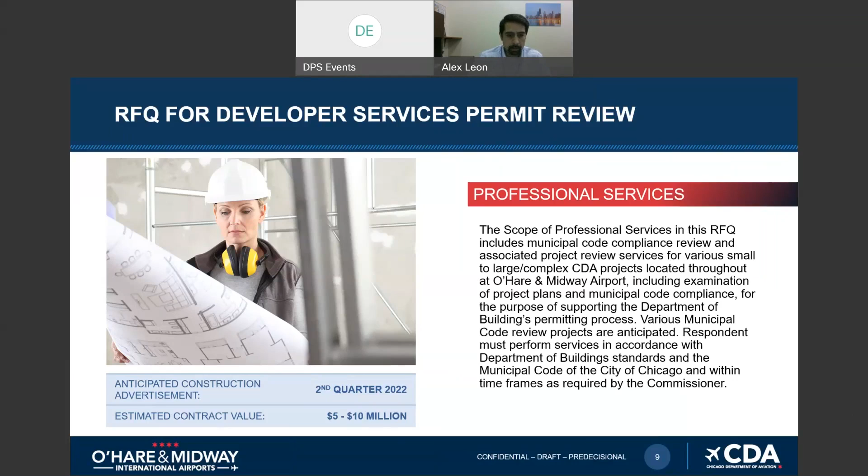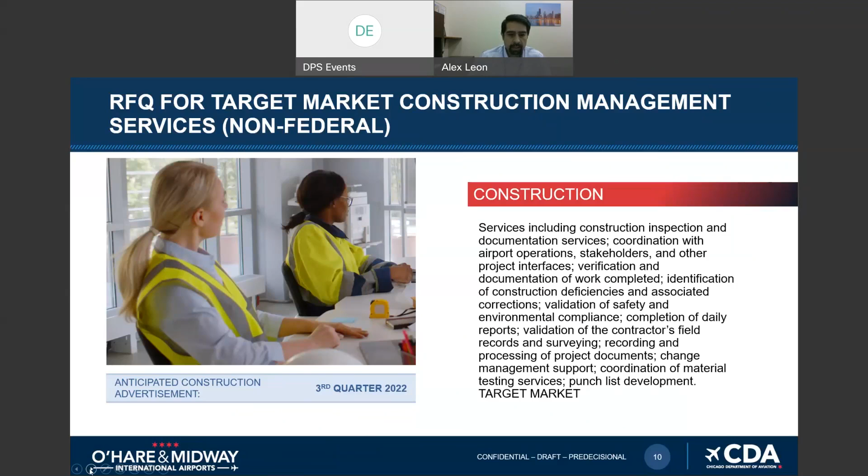The second opportunity in professional services is for RFQ for target market construction management services. This contract was previously out. We are going to re-advertise in the third quarter of 2022. My understanding is that there were some issues with those contracts, and those that had submitted have already been notified by DPS. So again, we anticipate re-advertising of these contracts in the third quarter of 2022.

Next slide, please. And as I mentioned earlier, these are construction opportunities through DPS. So these are typical opportunities that you would find on the DPS website if you're signed up to receive their alerts.

The first one's a restroom modernization program. This one's for Terminal 5. We've completed a couple of projects a few years ago in the domestic terminals, Terminals 1, 2, and 3. This one is for Terminal 5, for those sets of bathrooms that are in the original or existing part of the building, not the new building, not the extension part.

We anticipate this would be an SBI 1 category, and the advertisement would be here shortly, second quarter of 2022. The estimated contract value is $3 to $5 million. Next slide, please.

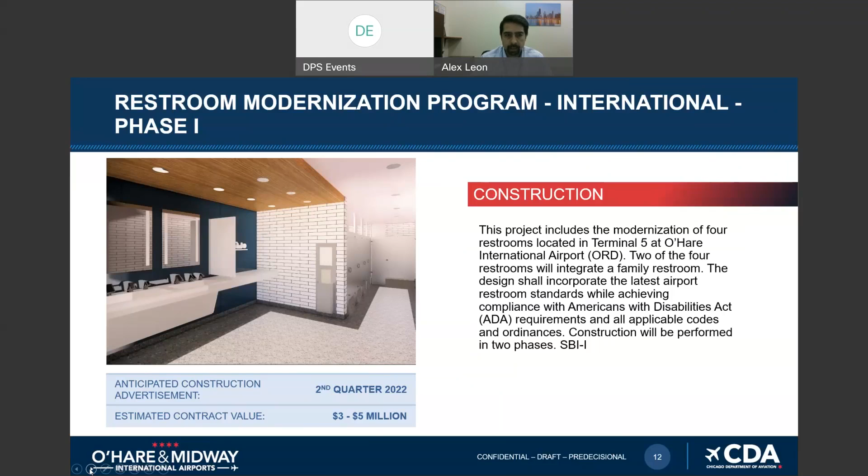Terminal building ADA and Terminal 5 building ADA improvements. Again, this is another project centered in the Terminal 5 campus. This would be throughout the facility at the curb front, and then as identified by our requirement from the FAA, we have to do periodic inspections. We just completed our own ADA survey as well, so this would leverage both of those studies or surveys that have been performed, and we're going to make some improvements.

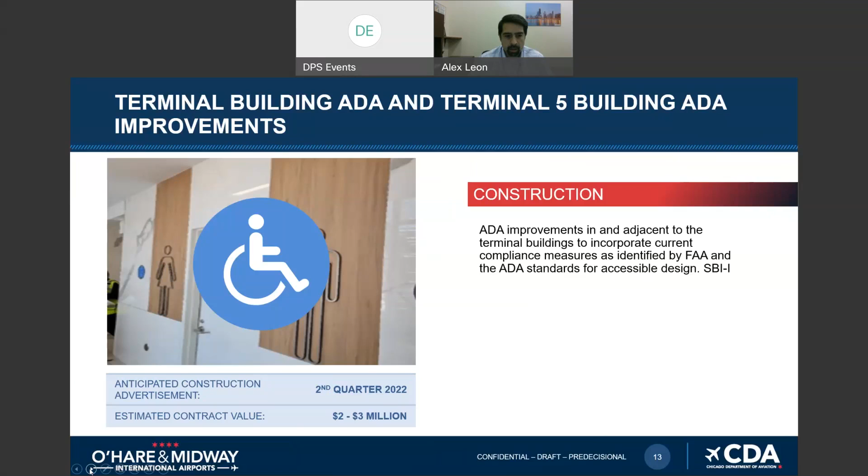So this is an SBI 1. We anticipate second quarter of 2022, so here shortly. The estimated contract value is $2 to $3 million. Next slide, please.

Terminal parking garage structural investigation and repairs. This is a Midway project. We've just completed a couple of projects that were part of the Midway modernization. Parking garage enhancements was one of them. Out of that design and some of that work, we've identified some repairs needed in the helices. So this project would go out to address those issues.

We're still trying to figure out if this would fit within one of the SBI or MBI categories, so to be determined yet. This would be advertised here shortly in the second quarter of 2022, and the contract value is $1 to $2 million. Next slide, please.

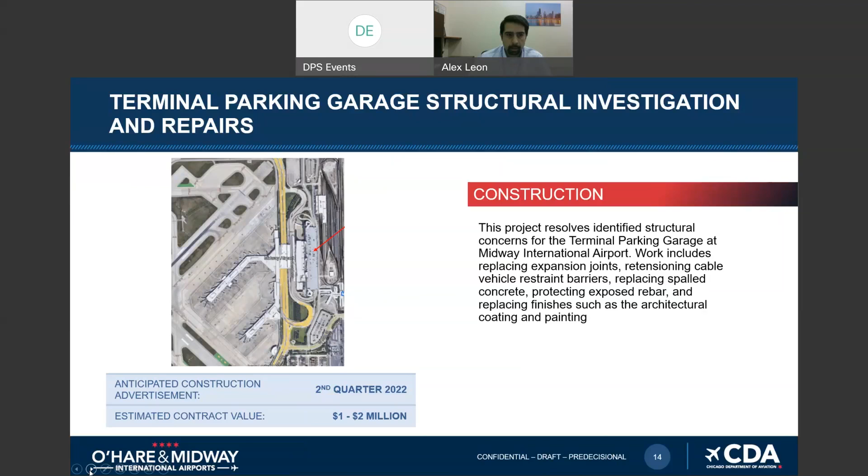Ring tunnel exhaust system. This is a project in the ring tunnel, the primary area within O'Hare where we have all the major utilities, all the major piping that goes around the campus, Terminal 1, 2, and 3. So this project would address the exhaust fan and some of these other ventilation issues that's part of that ongoing work there. This is an MBI 1. We anticipate an advertisement in the third quarter of 2022, and this is $10 to $20 million.

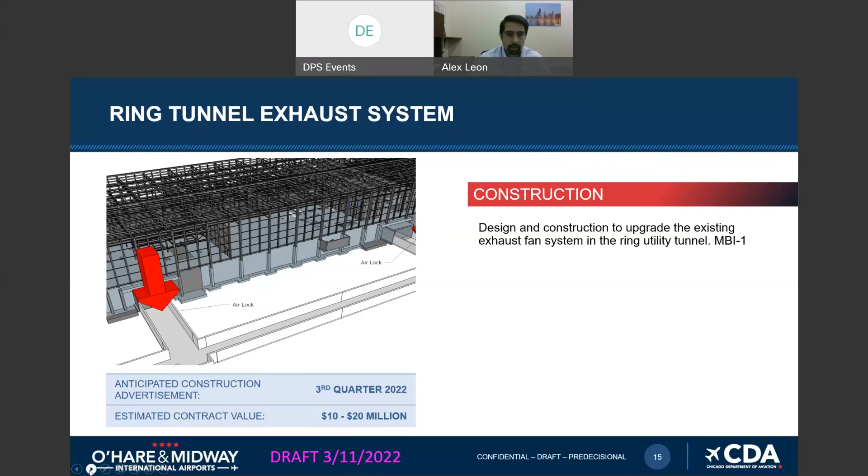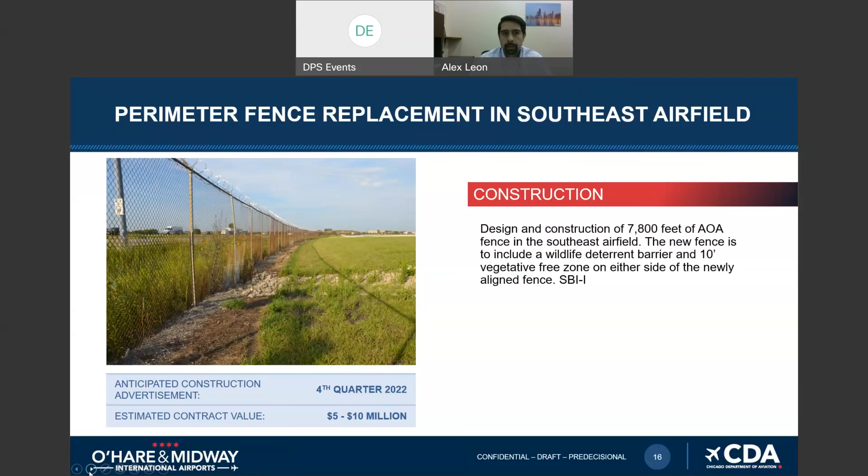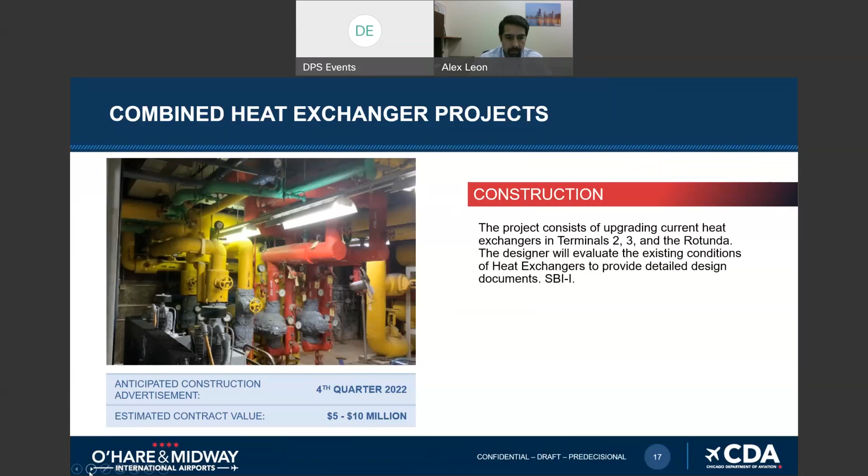Combined heat exchanger projects. This is part of HVAC improvements that we've performed throughout the terminal complex, addressing Terminal 2, 3, and the Rotunda. We anticipate this to be an SBI 1 category, and we will advertise here in the fourth quarter of 2022. The estimated contract value is $5 to $10 million. Next project, please.

90-inch Jawa relocation. This is a project that's going to support the I-190 improvements that are going to be performed by IDOT. This moves the 90-inch Jawa water main and also a 48-inch water main. This is currently under design. We're still trying to determine if it fits in one of the categories, but more than likely it's going to be an M&W project. Fourth quarter of 2022, and it's going to be over $20 million. Next project.

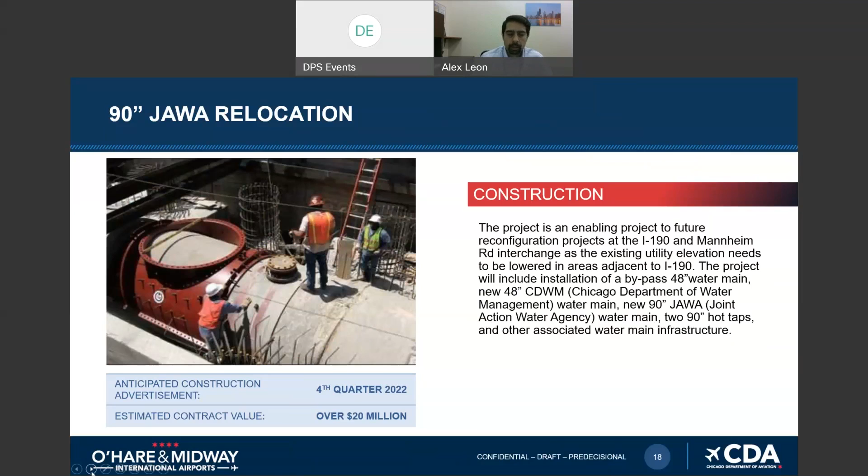Spine Road airside relocation. Now that we're at the tail end of the Terminal 5 extension completion, this road served a purpose, but the reason we need to reconstruct it is that we ran utilities through there, primarily an electrical duct bank, that was never properly backfilled, so part of it was used for a haul route. Now that we've completed, or are at the cusp of completing, the Terminal 5 extension, we're going to rebuild the road and move it airside. It used to be landside, so now it's going to be moved airside as part of those improvements for Terminal 5. This is an SBI 1 category. We anticipate fourth quarter of 2022, and it's $5 to $10 million.

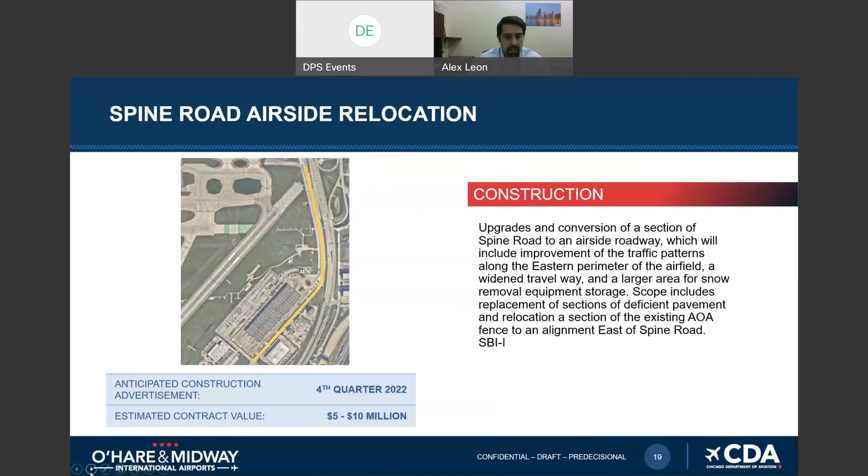Taxiway Lima Lima Phase 2 extension. Again, this is work in the Terminal 5 complex campus. This cleans up a lot of that irregular airfield geometry that we have. It provides for adequate separations for taxiing aircraft. I believe, if we pursue grants for this project, it'll probably be DBE. This is fourth quarter of 2022, and it's over $20 million.

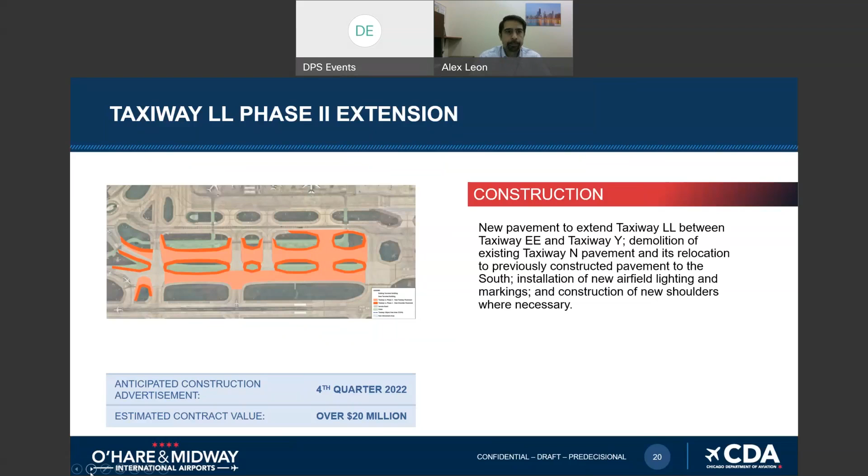Ring tunnel electrical and lighting infrastructure. Again, this is in that ring tunnel. A lot of work is going into the ring tunnel in preparation for the work that's going to occur in Terminal 1, 2, and 3. We've had a number of projects there over the last 3 to 4 years. So this one addresses lighting, improves lighting, and then also life safety improvements as well. More than likely, we're still evaluating whether it would fit into one of the SBI, MBI categories. If not, it'll be an M&W, MBE rules will apply here. Second quarter of 2023, estimated to be $5 to $10 million.

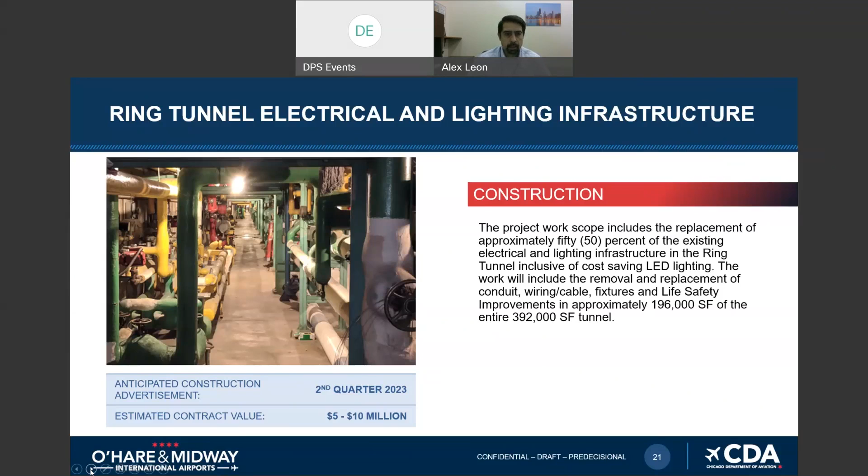Fire hydrant and backflow prevention improvements. This is to improve the water quality. We had a project the last few years where we completed some water main work; it was providing poor water quality issues in parts of the airport. So this is a second part of that project that aims at improving the water quality throughout the campus of the airport. This is an SBI 1 category, fourth quarter advertisement of 2023, estimated contract value of $2 to $3 million.

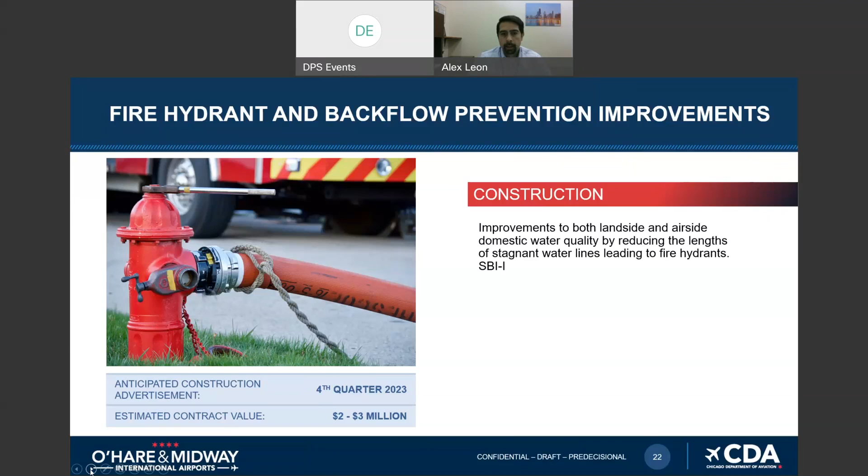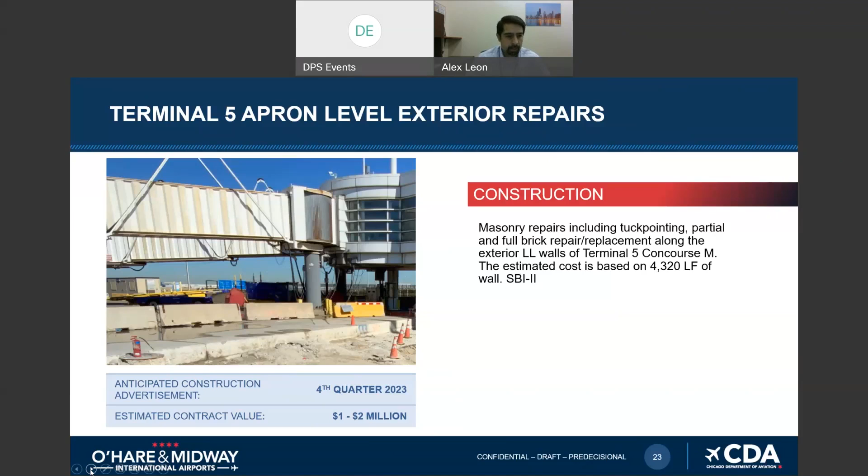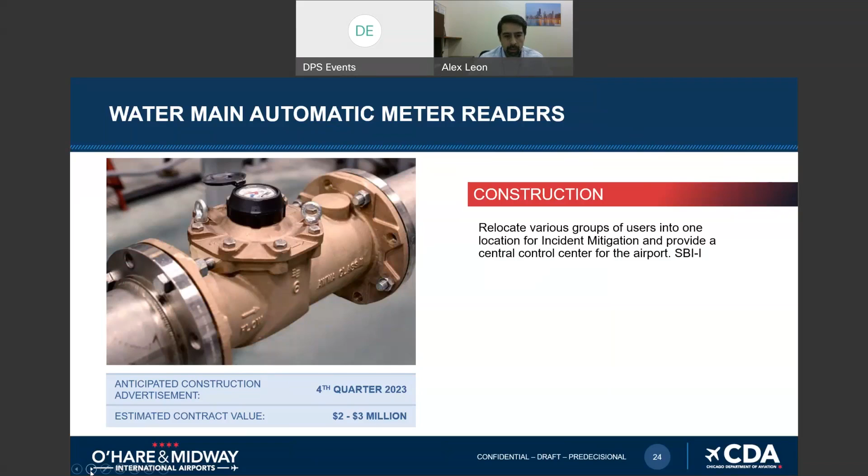Water main automatic meter readers. Again, this is another part of a project that not only improves the water quality throughout the airport, but also gives us the opportunity to add additional meters to understand if there's any leaks or other issues. So this helps us improve the water quality as well as metering and understanding where the water consumption is throughout the airport. This is an SBI 1, fourth quarter of 2023, and we anticipate this to be a $2 to $3 million project.

AMC building renovations. This is to the existing Airport Maintenance Center, not the newer facility, but the older one. This addresses a lot of the issues, some code compliance throughout the facility. We anticipate this to be an SBI 1, first quarter of 2024. $5 to $10 million is the estimated contract value.

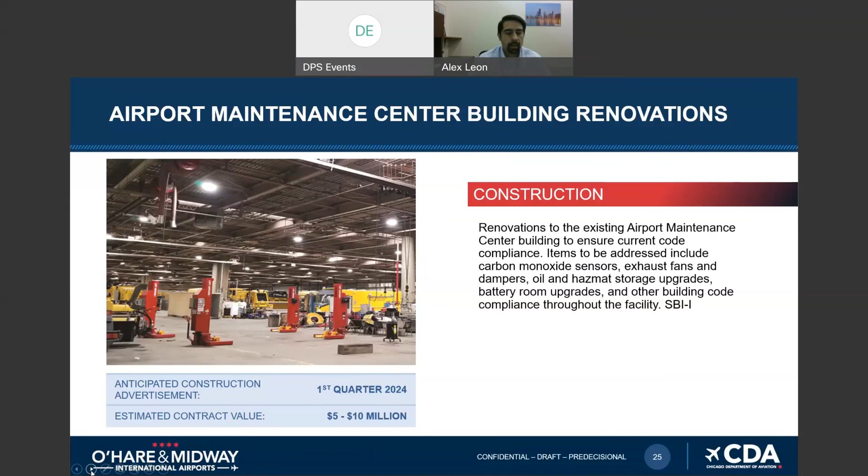Terminal apron level overhead roll-up door replacement. This is in the Terminal 1 BC complex. This is a project that was approved through the lease agreement. Some of those doors are in need of repairs, especially since vehicles, tugs, etc. go through there often. So this will make some improvements with those overhead doors. SBI 2 category, fourth quarter of 2024, and the estimated contract value is $1 to $2 million.

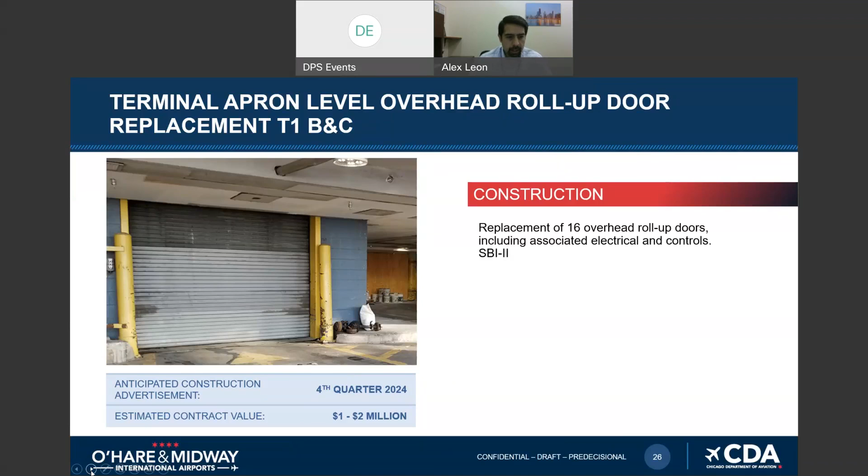Staying in the Terminal 1 campus, this is additional apron level repairs: masonry, tuck pointing, brick repair. A lot of this area with the tugs and those vehicles that move in and out addresses a lot of the issues, a lot of the repairs caused by those vehicles in and out of there. It's an SBI 2, fourth quarter of 2024 is our estimated advertisement date, and estimated contract value is $1 to $2 million.

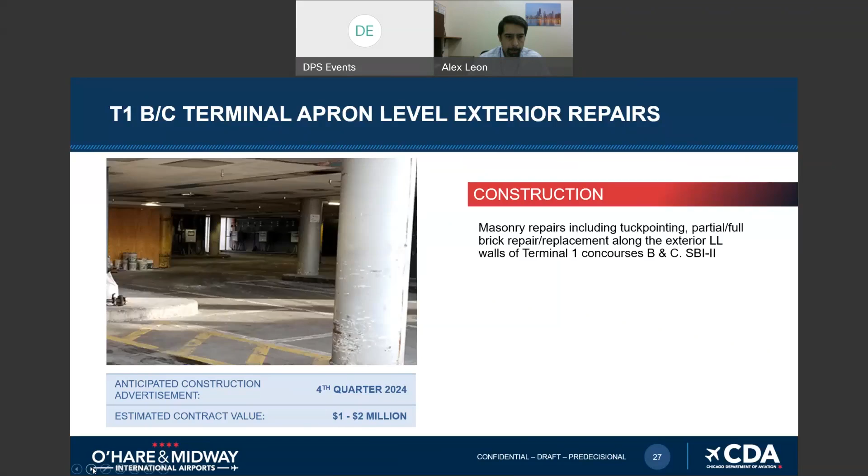Terminal core upper level expansion joints and sidewalks. This is Terminal 1, 2, and 3. Every so many years, we have to go in there and replace the expansion joints so we don't have leakage into the lower level. We're just completing some of those infrastructure improvements in the lower level, so now we're focusing on the upper level with these joints to extend the useful life of the deck and address any leakage issues.

It has not been identified whether it would fit into one of the MBI, SBI categories yet. We're still determining that, but it's advertised in first quarter of 2025. The estimated contract value is 5 to 10 million. Next slide, please.

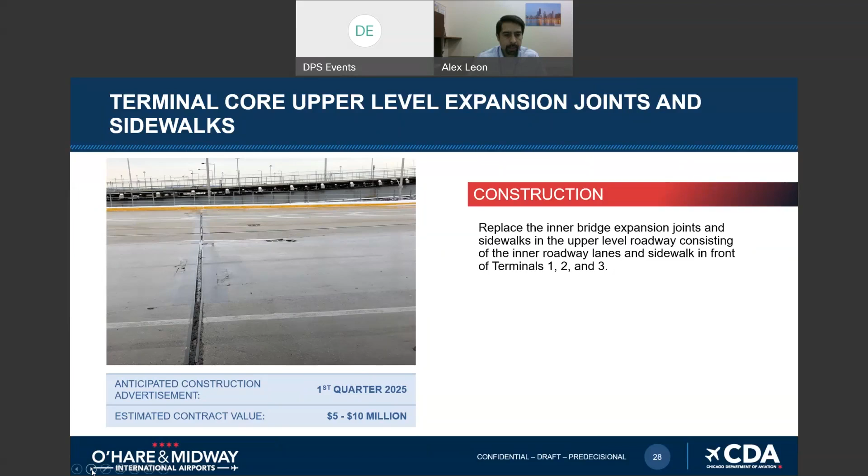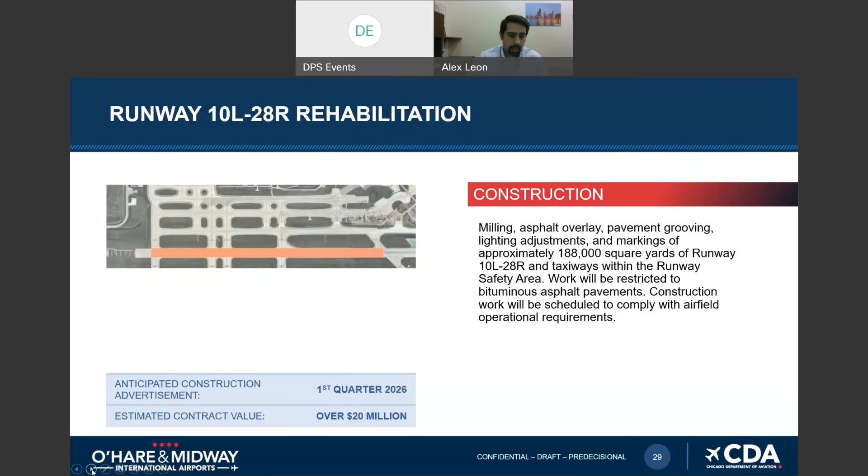Runway 10 left, 28 right, rehab. This is a requirement per FAA. We need to maintain friction and all the other things that come into compliance for Part 139. So every so many years, we have to go in there and rehab the runways. This has not yet been identified. It's slated for 2026, so if we pursue grants, DBE rules will apply first quarter of 2026, over $20 million. Next slide, please.

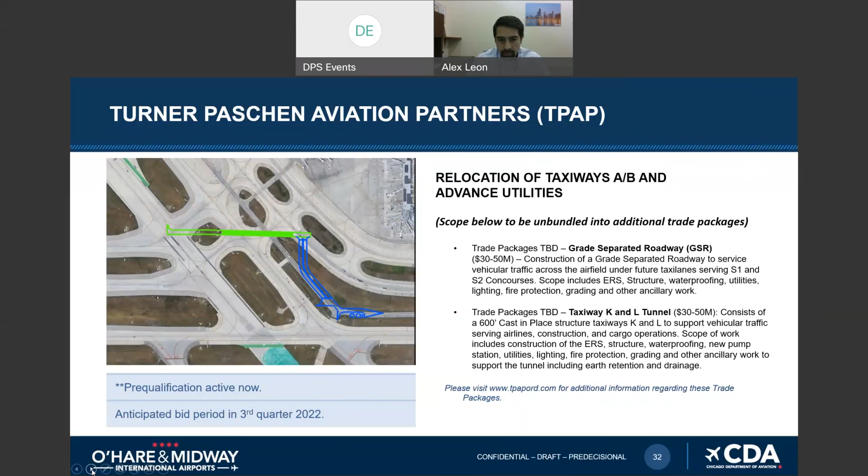Turner Paschen Aviation Partners are also performing extensive work here in taxiway A and B. Right now they're focused on the advanced utilities, and a couple of projects highlighted here are the grade separated roadway and the taxiway Kilo and Lima tunnel work. Again, to pre-qualify and or for opportunities, you can visit the website listed here for additional opportunities. Next slide, please.

For the CMARs, on the slide deck there's a website where they can go. You can go 2 to 3 slides back. For example, Turner Paschen and AECOM Hunt have their own procurement websites, and they pre-qualify as well as provide information on trade packages.

And then for Department of Procurement, they'd have to reach out to your group, right Jackie? Wait, I don't think Department of Procurement does any qualification, do you? We can get that information to the person that asked the question, get the link and the information of where they need to go to see it. Yeah, I can get that afterwards.

I'm just trying to look through my questions to make sure I've covered as many as we can today. Okay, here's one I didn't get to. I think this one is a question.

Do you anticipate any moving and storage professional services needs in 2022 or 2023? That sounds like it's also specialized, so that would be in the bid plan, in the buying plan, if we did have one of those contracts. Obviously this is beyond the design and construction scope, so if we do have an existing contract, we would list it on our buying plan if it's a contract that would go back out for re-advertisement.

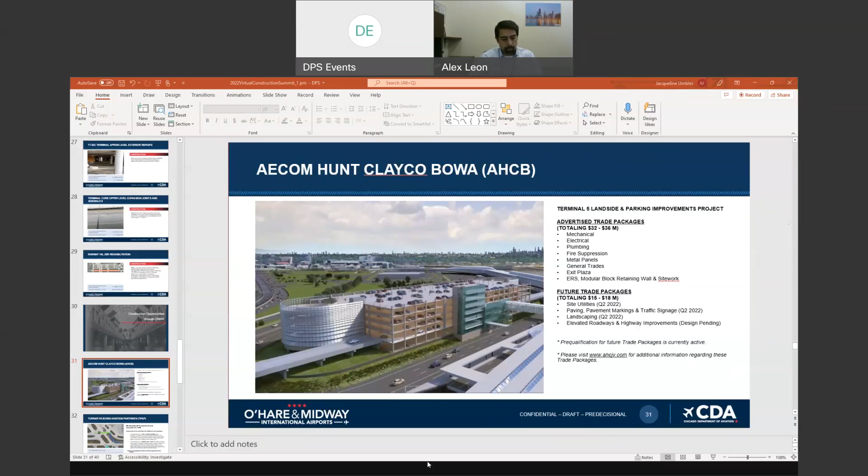Are there any additional questions? As I said before, I want to take this opportunity to thank Alex Leon from the Department of Aviation for taking his time to give us all of those great projects that you are able to bid on. Hopefully you found something there that you can either bid on yourself or partner with primes or other folks to bid on.